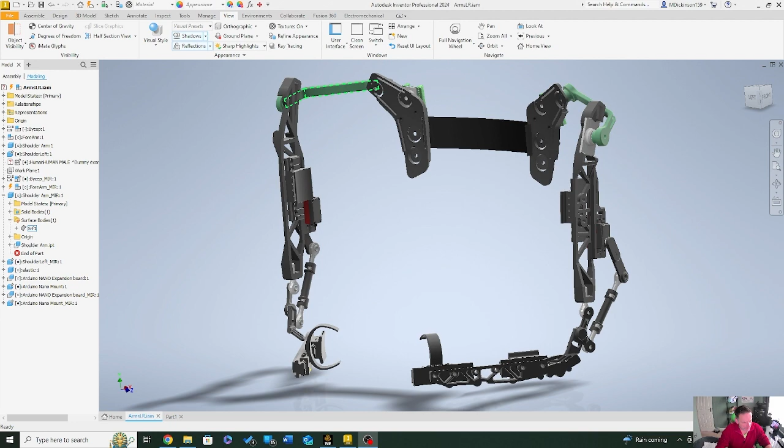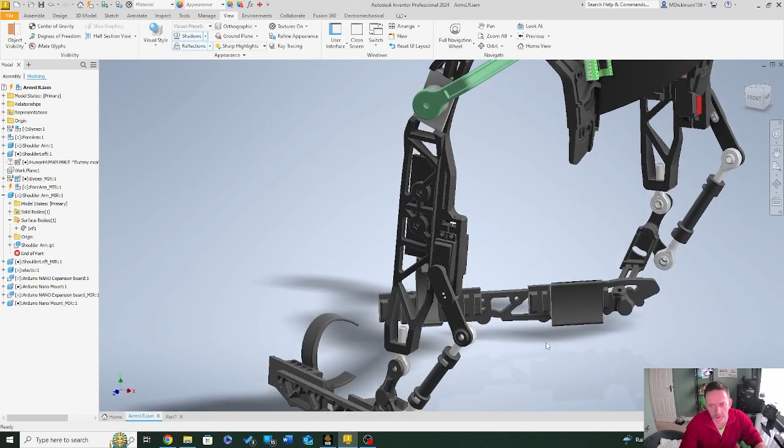Let me shrink it right down to here. Make that a little bit bigger. Okay, so you guys will not have seen this as of yet. This is an exoskeleton which has been designed to enable kids to actually really understand what exoskeletons are for, help with education. This originally started out as one arm, and I received feedback that it was too complicated, so it went from something like 15 parts down to 4.

So it's 1, 2, well, it's actually 1, 2 there, 3 and 4 attached on there. And I've recently added a shoulder blade on each side so that we can have a microcontroller. Really, it's interesting. We've gone through this so many times that this exoskeleton now is actually becoming a bit more of a viable exoskeleton. So just for you guys, it uses Picatinny rails.

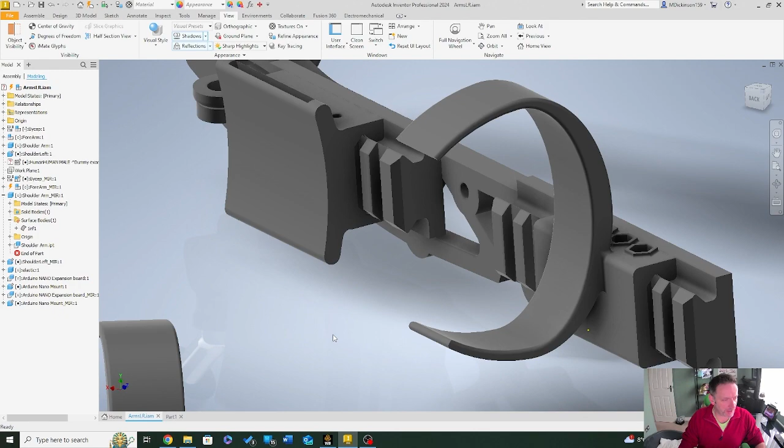Thank you, Aiden, if you are watching. Great idea. So one of the student chapters suggested Picatinny rails for quick release and access. And it uses Picatinny rails for the shoulder pieces as well, but the problem is it kept falling off your arm. Right, so let's not mess around too much.

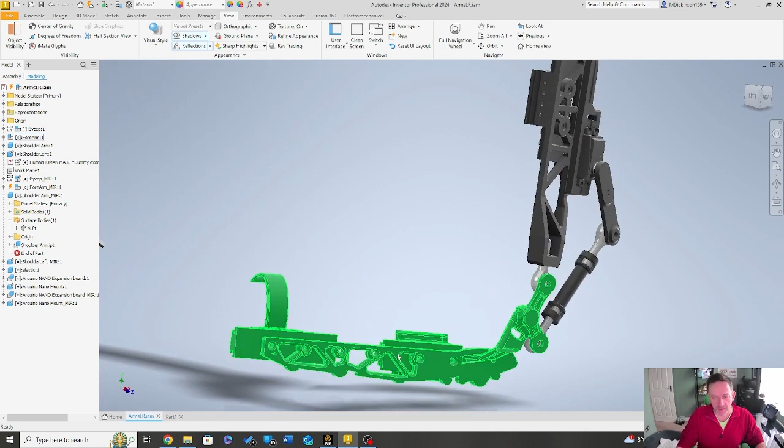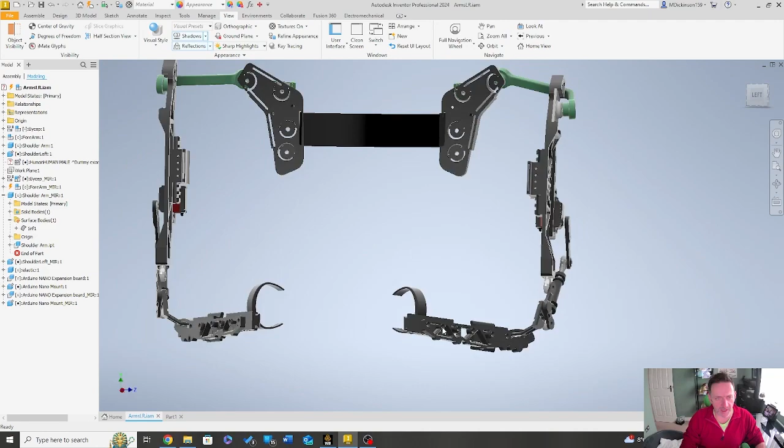You'll see here that the arm itself was originally designed to activate around the elbow. Now this section here is the brace piece. So what I've gone and done is I've taken a base material chunk. This is from the original design, and what we're going to do is pass this into Ansys and let this run through. Now the only reason I've not given you this is just because this still needs to be physically tested, and as to date, which is the 4th of the 11th 23, we've not tested it yet, but coming this Wednesday we should be doing that.

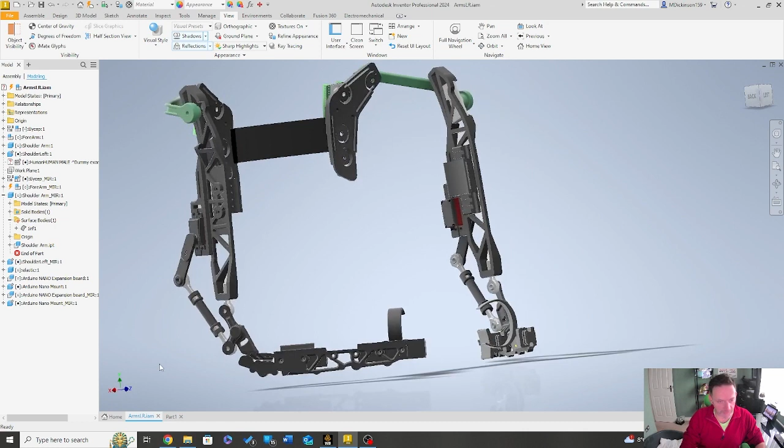Anyway, so let's not digress too much. So this is going to be my piece. Now what I want to do is I want to use a system in Ansys called topology optimization. The idea is when stress occurs, in fact, let's not mess around, let's get this out, then we can manually see this. So the reason I've gone to my Inventor is because most people nowadays tend to use a CAD system outside. So I'm going to export.

For this example, I'm going to put it on my desktop. Oh no, I don't want a shortcut. I'm going to put it on my desktop, and I'll just leave it as a new file. But what I want to do is I'm going to export it as a STEP file. I personally always operate in STEP files, and I'm going to click OK.

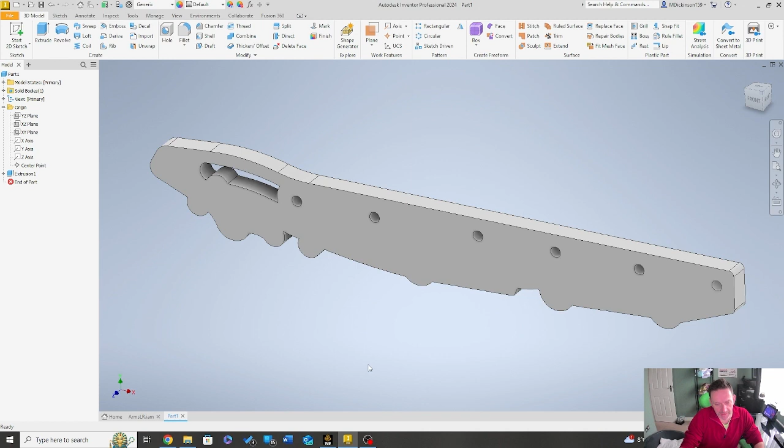Now in Ansys, this is Ansys release 22, and what we have here is our overall interface across, and I'm going to drag and drop a static structural approach. What I'm going to do first is look at the arm piece when somebody is holding a 20 kilo weight. We'll calculate out the force, because obviously it's 20 multiplied by 9.81, and that will give us the force that's applying around the key points of what we're going to attach to.

But first things first, let's bring in that geometry. So I'm going to right click, go to import geometry, and browse to the position where my geometry sits. Right click, and I will always recommend that you review this. So I'm going to use SpaceClaim to review the geometry. You can use SpaceClaim as a CAD system, but I only ever really use it to review the geometric representation.

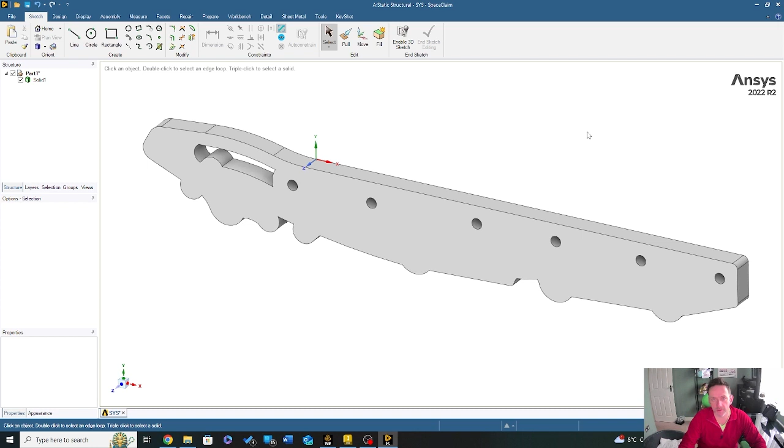After the part is imported, you'll get it brought in, and it's similar to any CAD system, if anybody's used to it. So as ever, you can spin it around, have a good look around. On the left side, you've got your design tree. Structure sits here. I can disable the solid and have nothing, or I can re-enable to ensure. Very, very basic principle process, good for reviewing and changing when needed. Okay, so I'm happy with the component. So I'm taking that back out.

For this particular one, I'm actually wanting to see how well this will perform. Not as a structural steel, but I'm actually going to do it as an aluminium alloy. So, let me just go to aluminium alloy. I'm going to go to my general materials, bring that up, scroll to a position, and I'm going to add the aluminium alloy. So aluminium alloy is in my study.

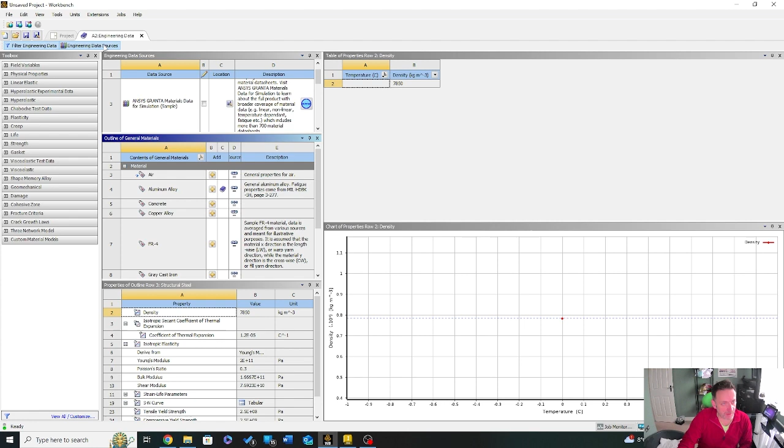Close this, and then I'm going to go to my setup, right click and then edit. After a couple of minutes, depending on your PC's capabilities, you will then get your geometry in. Now again, I'm just taking this purely from my Exo design. Once we've tested this and I'm happy with it, I'll release these designs anyway, so people can have a go.

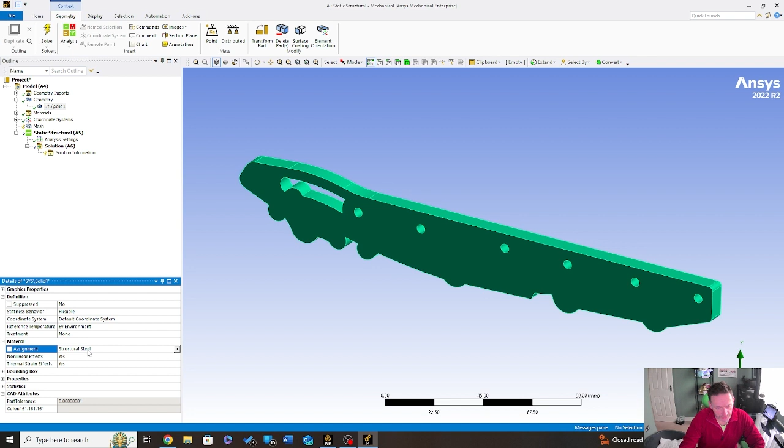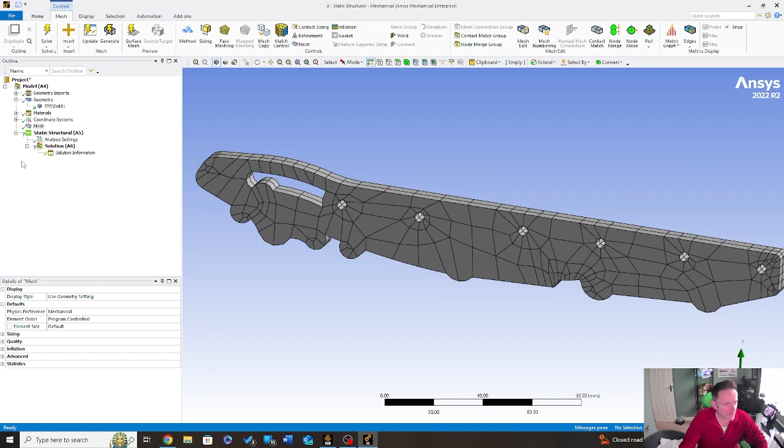For my material, I'm going to go to my geometry, and if you remember, I assigned aluminium alloy, but it's still structural steel, so I'm going to drop my assign and change it to an aluminium alloy. Now I'm going to do a normal meshing procedure. I'm going to just do a couple of things on this. If you look round at that as a piece, it is quite chunky. I'm not quite happy with that. But first things first, let's just get things going.

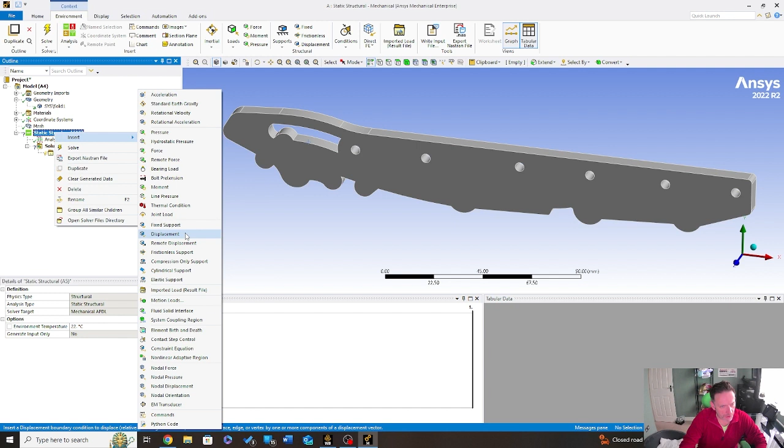I'm going to presume that it's fixed on this face, because based on the original geometry, that's how it actually fixes. It fixes around here where there is a plate that interfaces with the elbow. So we're assuming that piece here to be fixed. So I'm going to come back to my static structural, insert, and go fixed. I'm going to come to here and apply. So that now applies to that position.

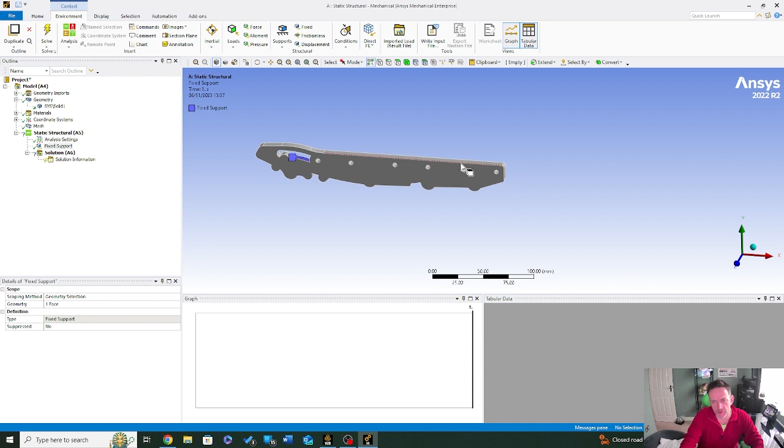Now, the way that this works is we've got parts all the way down here, and it's supported at key spots all the way down. I'm going to assume that it's just held on the end piece, because I don't want this tutorial to go on forever. I just want you guys to get a good idea of how to interface with this topological optimization feature, which is a fab feature if you do get a chance to use it.

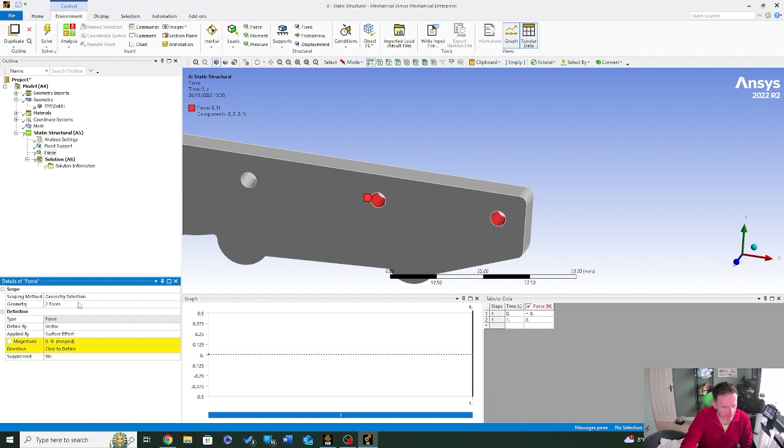So I'm going to go force, and come across here. In my force, I'm going to select this piece and this piece. These are the two holes that mount the Picatinny rail for the wrist. So I'm going to click apply. At this point, I can either go vector, where I choose which way I want to go, or, being a bit of a stickler, I like to use component.

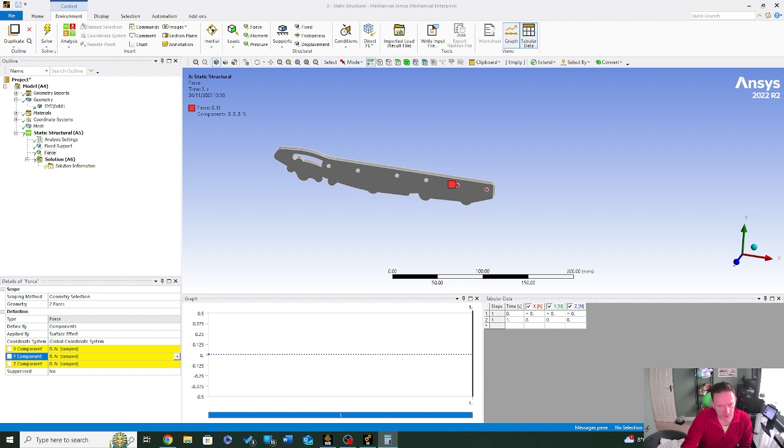So in this case, how many newtons do we need? We're going to presume 30 kilos. I think we're saying 30 kilos. Multiply by 9.81 for acceleration, giving us 294.3 newtons. But because it's divided over two areas, let's divide that by 2, and it gives us 147.15 on each key component spot.

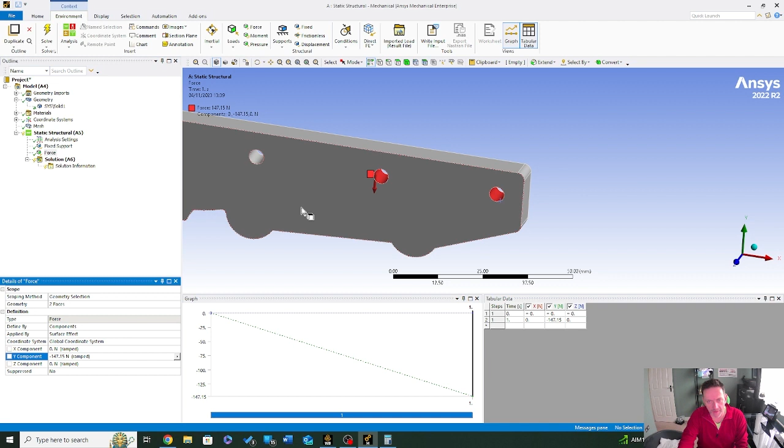So I'm going to go minus 147.15 and then apply. You'll notice I'm in the Y component, telling me I'm going downwards. Now I'd like to see how much it's displaced by. So I'm going to come to my solution, right click, insert, and go total deformation: how much did it bend in that process. I'm also going to insert equivalent von Mises stress, and then solve.

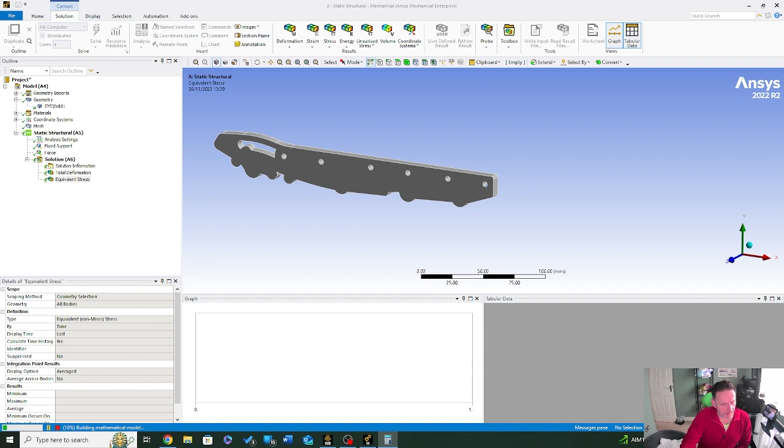This then runs through the solution, as we all well know, and any minute now it should give us a result. So the solution, and if I just take a look around, it's quite chunky, a little bit unreliable. I'm going to go to my edges and turn that off for a second. Look at that. Oh, it's horrid, it's awful. However, one important thing here is this section is red, this area. Then you look down here and there's all this blue, and there's next to no stress going on there.

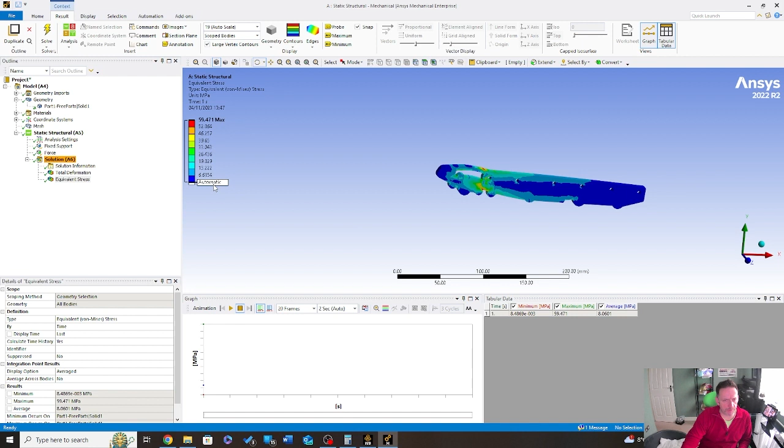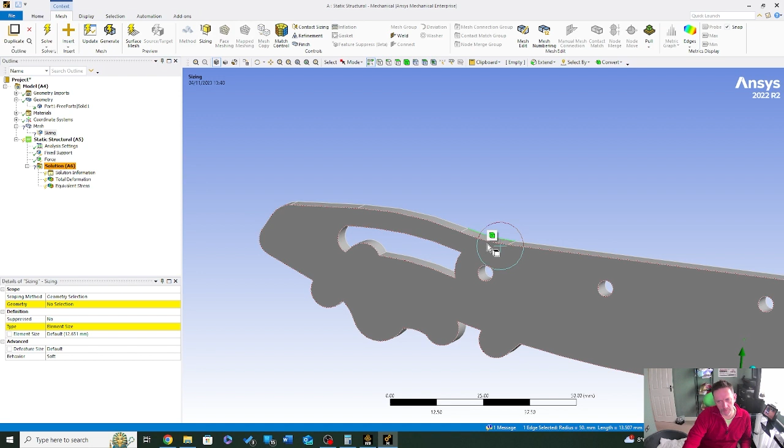This leaves a huge optimal opportunity to do topological optimization. First things first, I'm just going to quickly make a quick mesh to just tidy this up because I don't like it. So I'm going to go sizing, and let me just bring you out a little bit. I'm going to go this area, this area, and this area, and here, and here, like that.

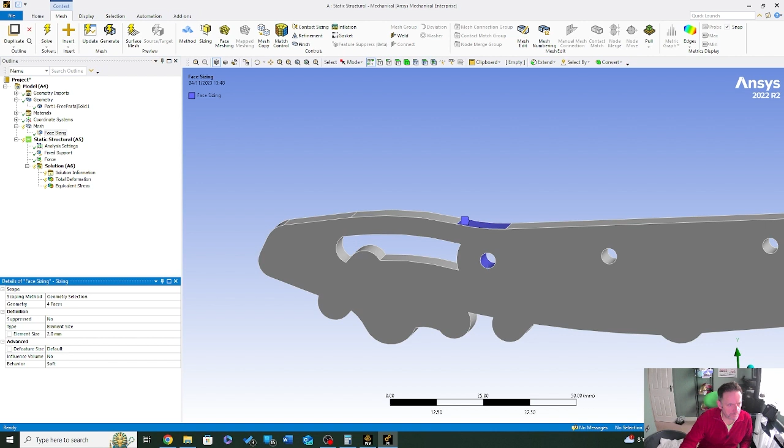Apply them into there. And size-wise, look there, default 12 millimeters. Boom, that's massive. So I'm going to go 2 millimeters. And then let's just resize that. It's still a bit chunky there. I'm going to go 1 millimeter. Give me something a little bit more. So again, generate that again. Looking a little bit more like it. Yeah, okay. I'll probably drop it even further. I want to get some true representation of what's going on, and that's a little bit better.

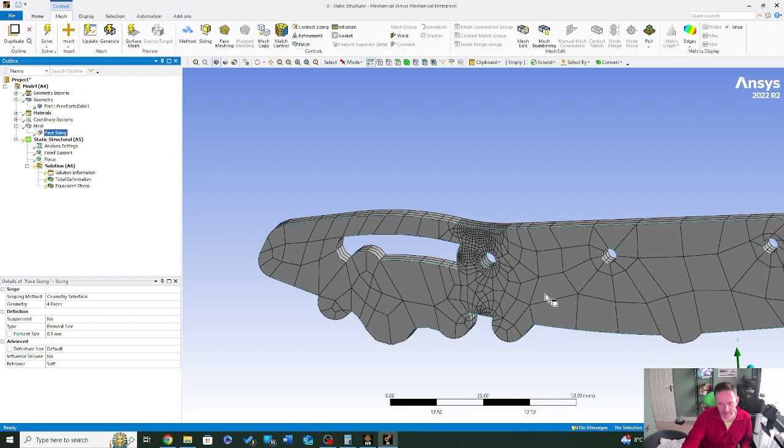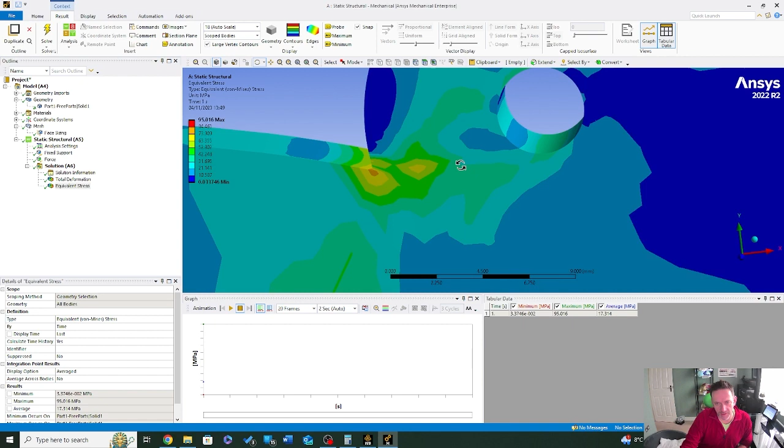Now you see there, if I just solve this again, it may allow for a little bit better of an optimizational process, which is what I'm after. So it's not perfect, but it's a lot better. Interesting, let's check it out. It's not the highest spot I thought it would be, and look at that. It's actually where I'd imagine, concentrating on the edging, which is good. And also down here, look at that. Now that's purely because, if you have a quick look, squeeze, squeeze. It's just squeezing on that lower spot.

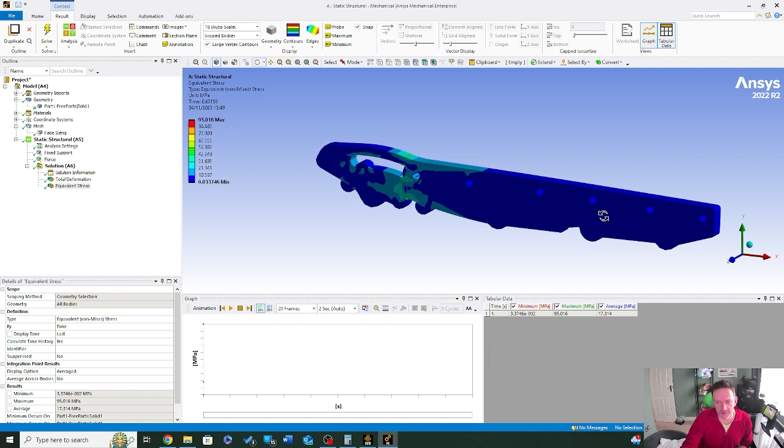So it's fine. It's well within the remit of what I want to do. So now I'm happy. I'm going to come out of there, close that, and now this is cool. I'm going to go down to structural optimization. I'm going to drop it over solution, and watch this. Bang! Results shared. Everything's within it. Right click. Let's go in and edit.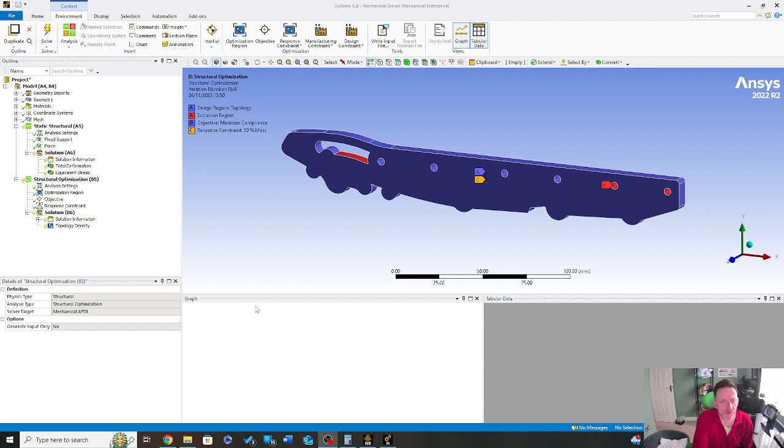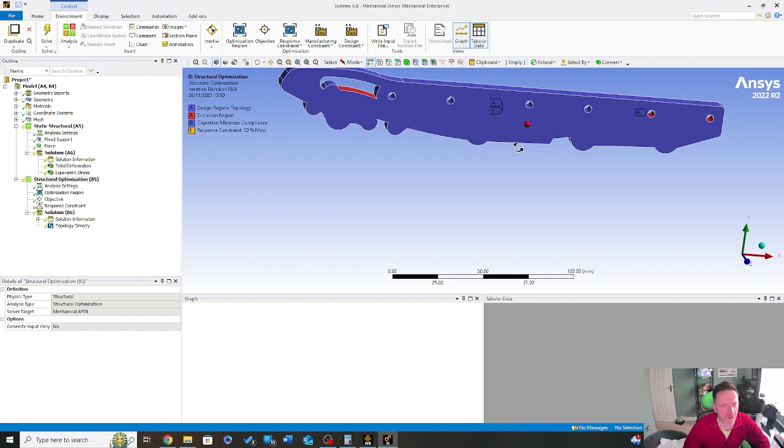Okay, so now once we've double clicked into topological optimization, you can see here the design region, and Ansys has already noted where it's actually going to be used. You've got your region A noted here to be the design region for topological optimization. You've got regions to be excluded, which automatically excludes the boundary condition areas. And then you've got the constraint of 50% of mass, and nothing is on there as of yet.

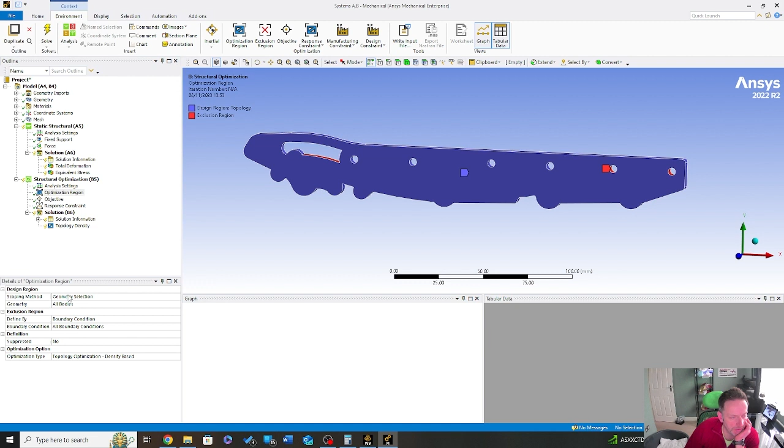So if I come down to my analysis, we're going to leave it at 500 iterations, trying to converge at an accuracy of 0.1. For output controls, we can choose different types of files for outputs. We'll come back to this in just a moment. So optimization regions. Within my optimization regions we can make some changes. We can look at all bodies, or alternate conditions for boundaries, but we're actually going to leave that.

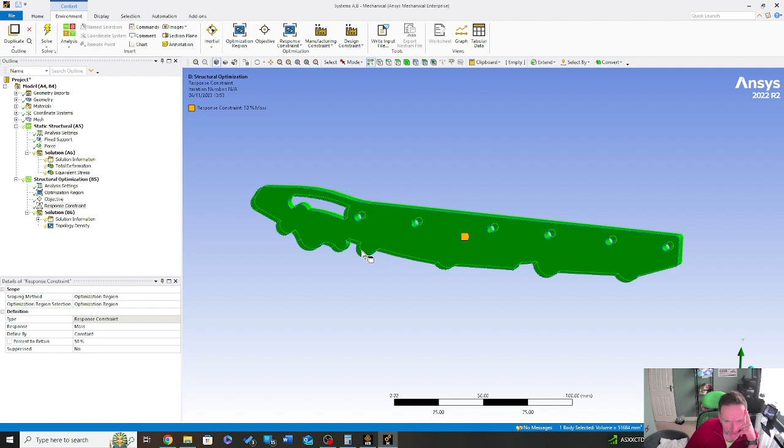So this is where it's quite cool. We're going to go objective. Under the objective, this is the default: program controlled, under static structural results, and it will run compliance from there. And then we have response constraints. I know for sure I've missed something out here, I think an output control, but I'll come back to this. If we come back to the constraints, you can see on here.

What I'm going to do here is change my percentage of material to retain. I'll go 65%. We can drop that down, but what this will do is run through topological optimization as many times as possible to try and get the most optimal result.

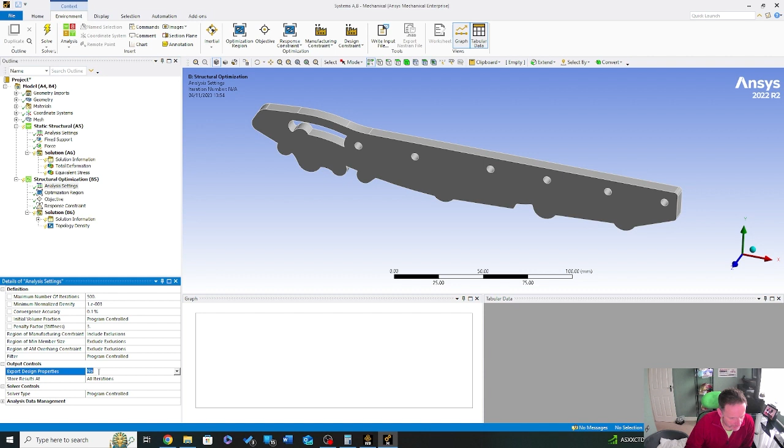I just wanted to check on something. So output controls, export design. Let's have a look. File to region, it's not that. Iterations? No, it's not that. Drive me mad. Ah, right, hang on. I was looking in the wrong spot. So for post processing, you see there it's only geometry. I can go only geometry yes or no. Topological density. Where is my STL export? 1 second.

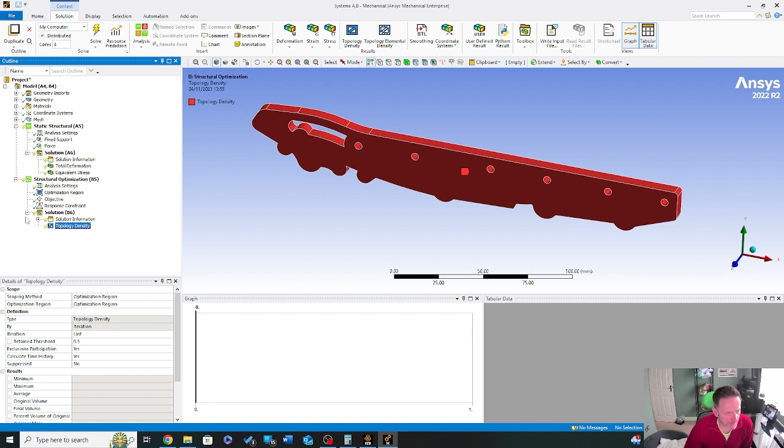So now, based on everything that we've got here, based on the topological setup, we should be ready to solve. So if I now hit run, if I solve...

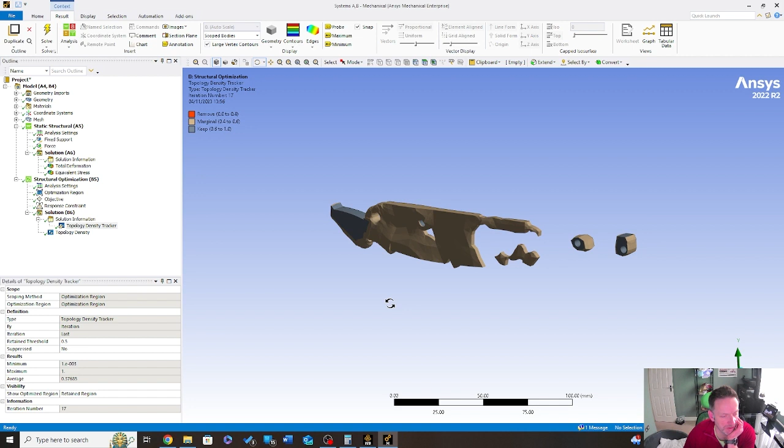Once it's done, you'll notice I've clicked onto topological density tracker, and this shows the processes it's going through, how many iterations, and the changes it's making. We can instantly see that the 65% material loss I suggested is not the best option.

It's given us different types of solutions here, so let's run through what it suggests. Yes, you see there that 65% is way too much. I should have really planned this one.

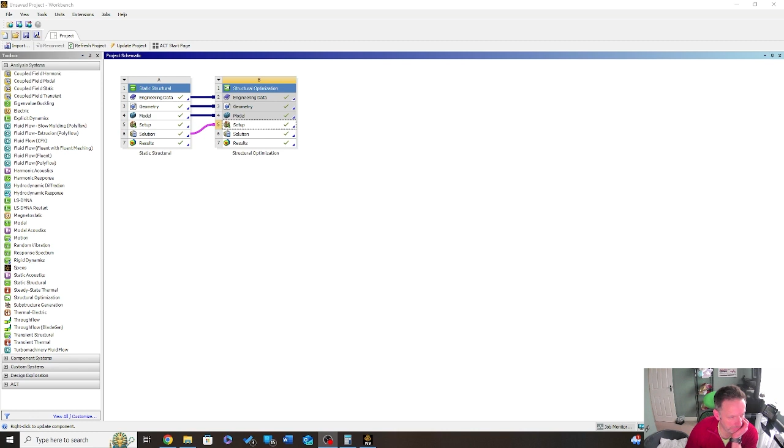So I've gone to change my percentage material retain, and rather than going for 60, I've gone for 85. Might even go 90%, just to give it a little bit more possibility of survival.

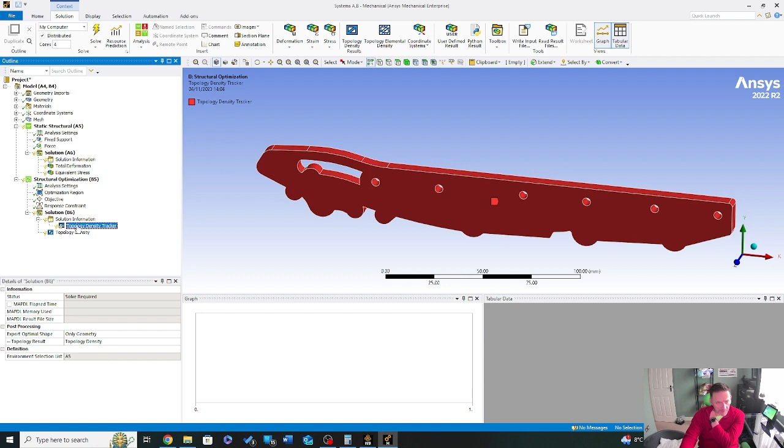So what I'll do is click on my topology density tracker and hit solve. If I try this again - had a couple of moments there where it just went on and off. I've now changed it to 85%, I'm on topology density tracker, and let's go solve.

Boosted it up - the regions were just too much. And really what I could do is restrict even further areas, which I'd like to be able to go back to. So let me just go.

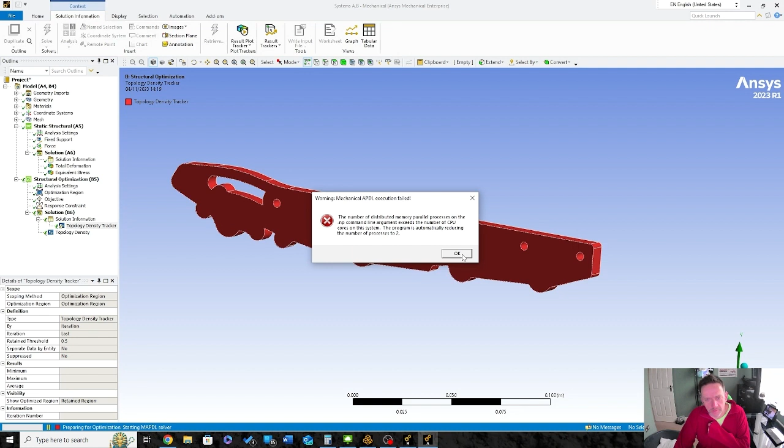What I'd like to do is restrict key particular areas, and in this case I want to make sure that where the Picatinnys are mounted, that they are also taken into consideration. So basically where the holes sit, I'd like to restrict them from that particular study as well, to make sure it gives me something sensible.

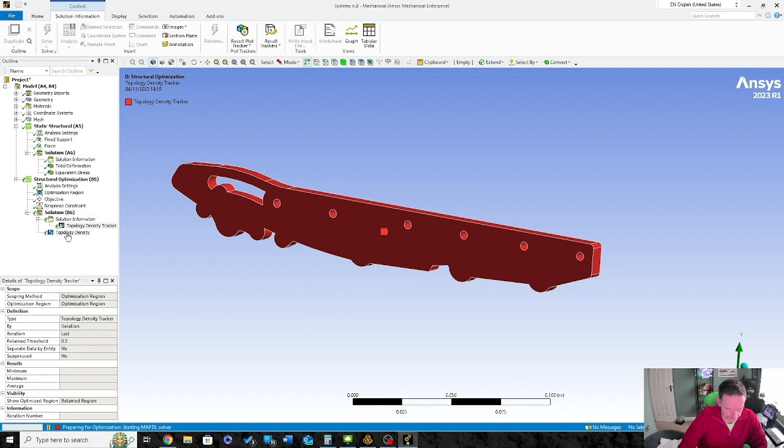And any minute now we should start to get a solution. And here we go. Let me go solve.

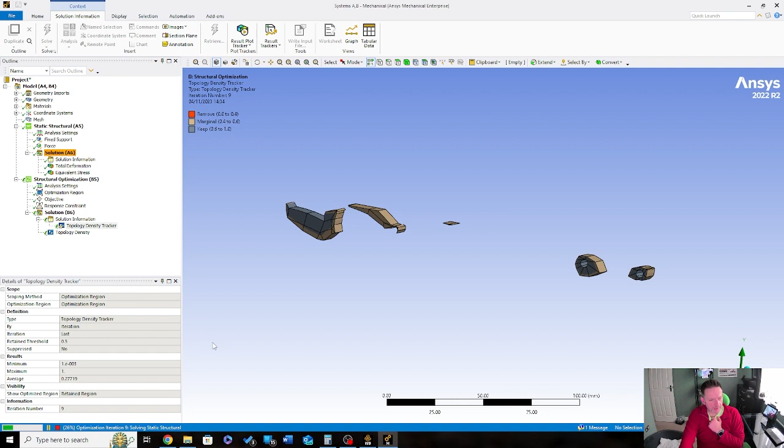But you'll see there, it crashes like mad because it's going - that's what it's actually done, and that's what it recommends, and you go, no, that is not what I'm after. So you just see there, it chops it all right back.

And then what I'll do is say, right, let's optimize the region, let's retain 20%. And then I'm going to do it again, so I'm going to solve.

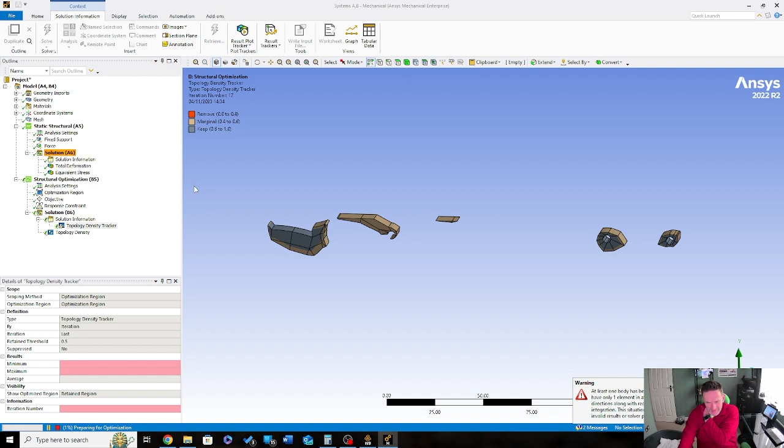If it's not going to have a dippy fit with me, because now I'm going backwards, I'm going all over the place. So we'll let this run through. So I'm now at 20%.

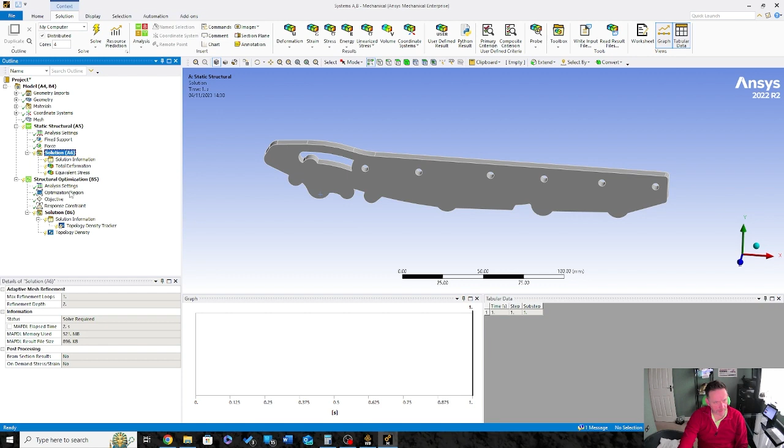So you're probably wondering, why is it doing all this weird stuff? Why is it creating these really odd regions? These normal regions actually appear just because of the optimization regional areas here - let me just rerun that - these appear purely because...

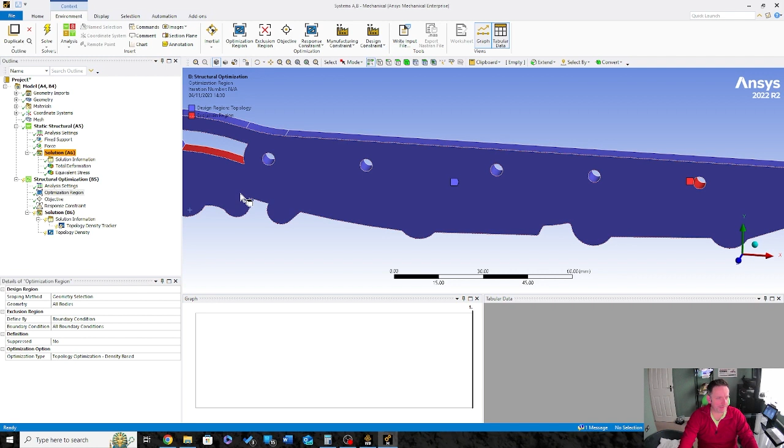...this design region for topological optimization, you basically said use anywhere on here, and it doesn't know to keep it all in play. Those of you who've seen generative design functions know that it can optimize areas, and you can actually put in key regions to it.

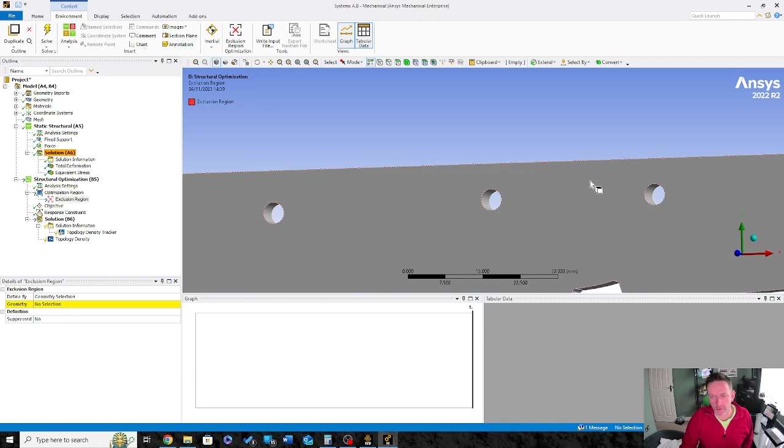So what I'm going to do here is give an exclusion region. My regions now - I know that I need these holes to be able to move forwards, and that one as well. These holes are there for where the other Picatinny rails are going to be. So I'm going to assign them.

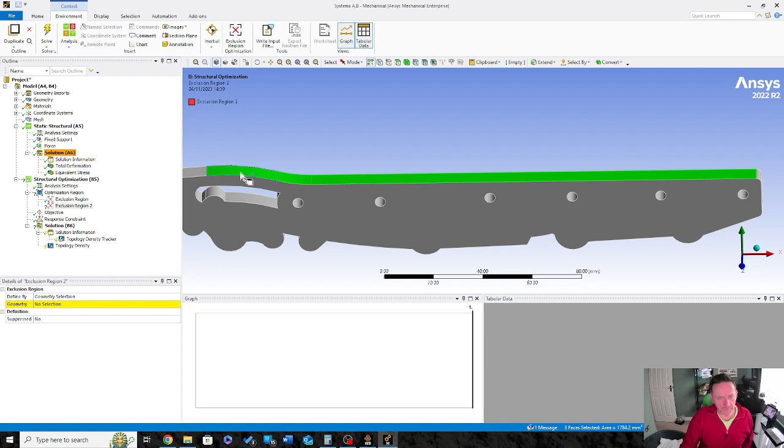Next thing I'd like to do is offer another excluded region. So I'm going to go around the actual outside piece. What I'm actually referring to here is not really...

I'm just colouring in, sorry. What I'm actually referring to here is not really on the outside face. I want these outside faces to retain here for this particular reason, because I want to be able to use the external to ensure that the assembly still works.

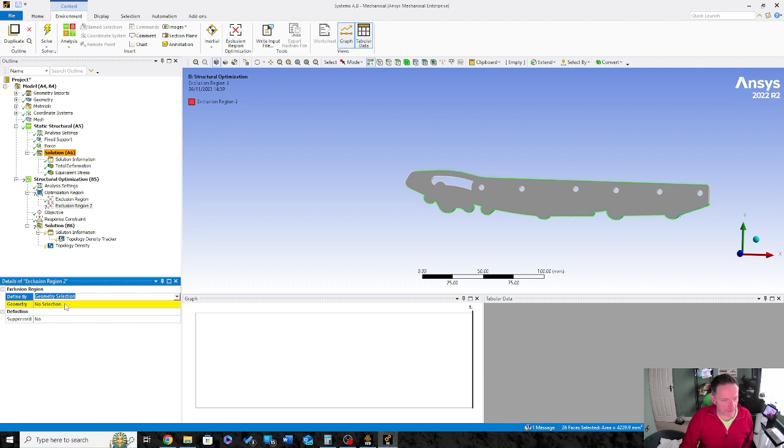What I want Ansys to do is consider the insides - is there something that could be done with them insides? So I'm going to just shift myself back, I'm going to say retain, I'm going to go back to 85%. This has just been me playing around. And what I'll do is run to a solve.

Now you'll notice that my meshing's dropped a little bit.

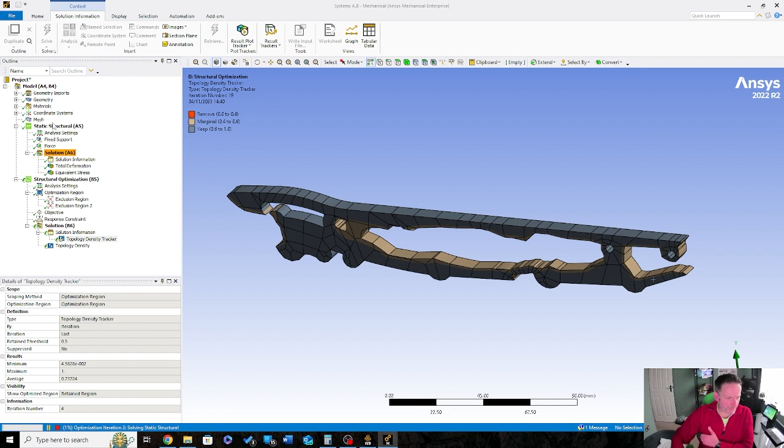I think I've lost one of my faces as I was just messing around. But what you'll see now is it starts to cut key particular areas out. Based on the results it's actually producing up here, it's recommending that the topological design could actually do away with these areas and still perform based on the criteria.

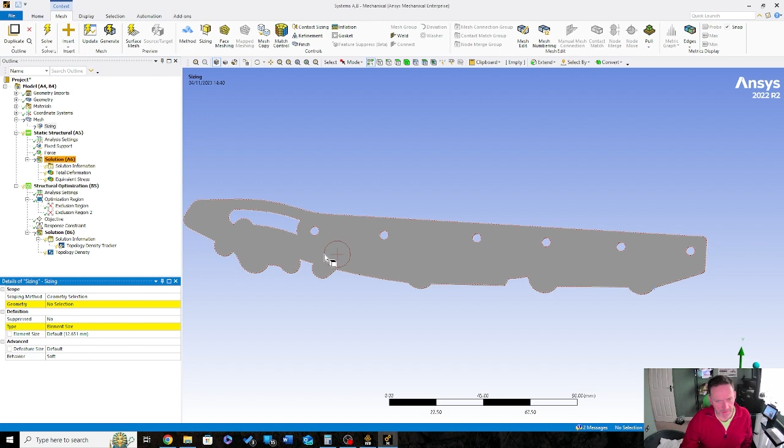The only thing I'm a little skeptic about now is it seems to have lost my regions of refinement. So I'm just going to add them back in, because for some reason I've lost them. I'll go on there like that, and I'm just going to rerun this study once again.

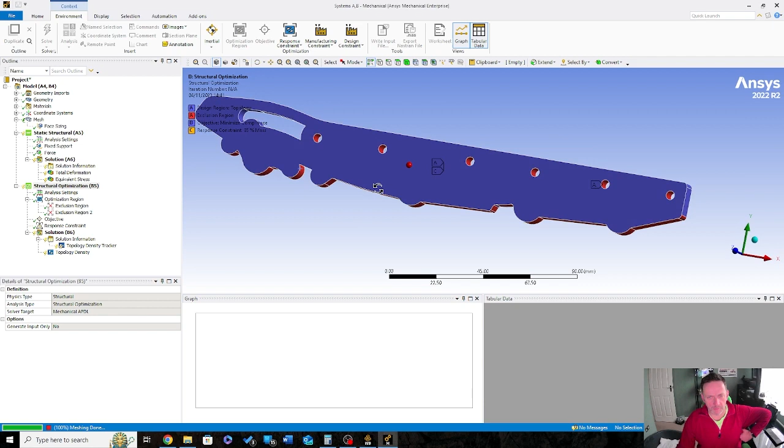If I run it again, what we start to see is it will run through that topological optimizing. Again, the red regions are where I've said don't change these, keep these in play. If I go to my tracker, give it a moment. Now what we get is it starts to rerun its key particular study areas.

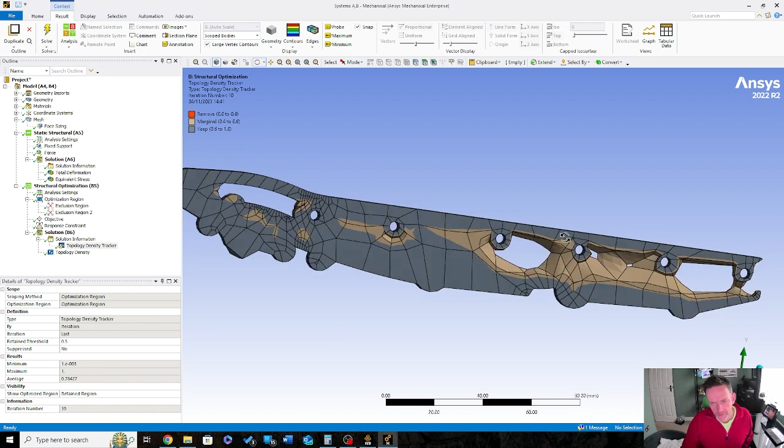Now look at that. Based on that refinement that I've put in there, it's now starting to say, you know what, I probably can't do that. And you'll notice on the mesh here it's quite clunky. Arguably, the end piece it's actually saying you could perhaps trim that right back.

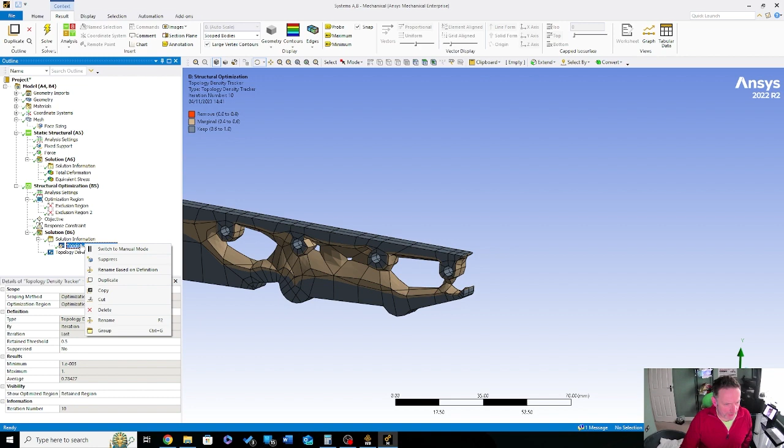If I want now, I can come here and export to an STL straight outright if I wish. This is quite interesting. So if I just now hit save, I'm just going to drop out of here.

Now what I'm going to do is go back to another static structural, and from my results I'm now going to bring it into the geometry here. From this, now I'm going to go into my study and go edit.

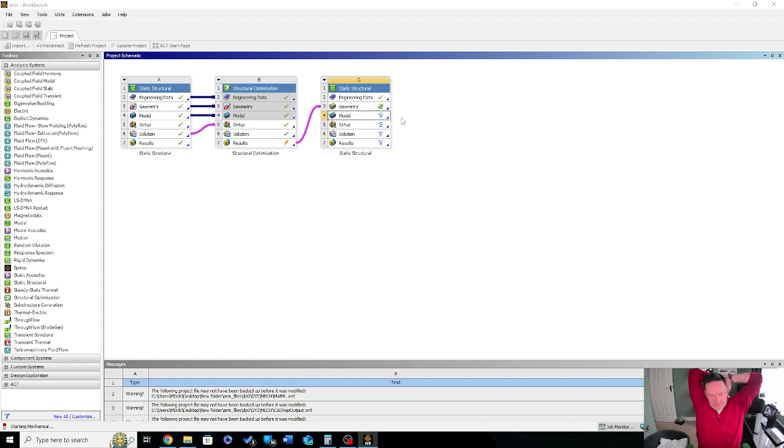Okay, so that just was not playing ball, so I've just removed that. I'm just going to pass back into my original. Right, get back to this original. There we go, on for the topology density.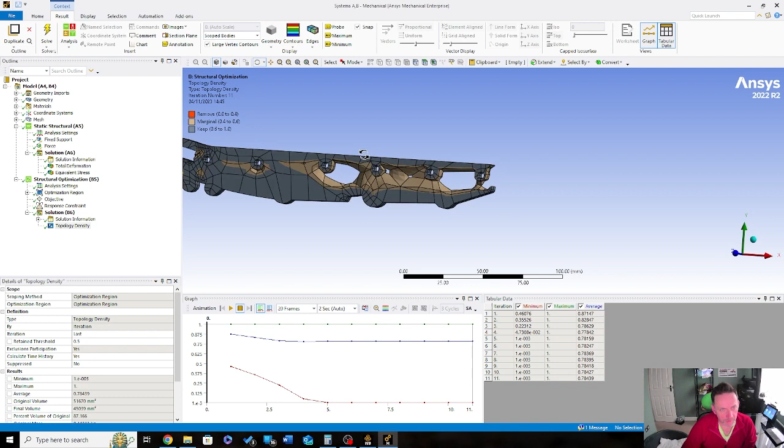You can see there what's been exported, so I'm going to export this, and I'll export this as an STL file. Let's just put this on my desktop. Let's go File, stick it there.

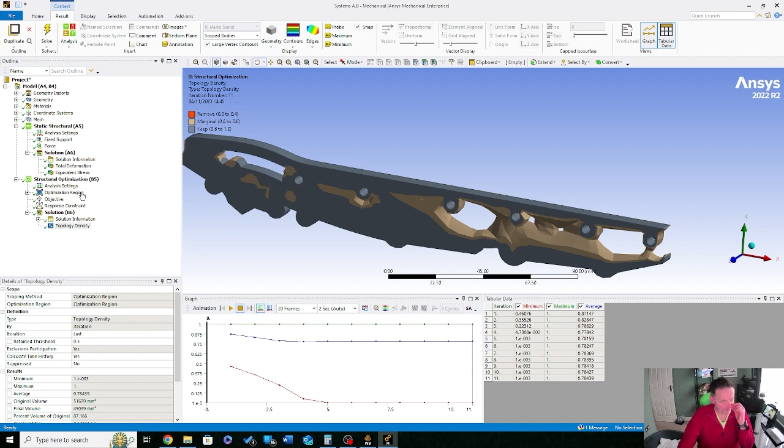And then what I'll do is I'm going to take this through to my Cura. When it actually loads, so now what this has done is it's topological optimized the actual profile.

And granted, I could run this through quite a few iterations yet to actually look at different changes that could be made. There is a bit, but this can now clearly indicate and help guide me into what I need to do on my next steps.

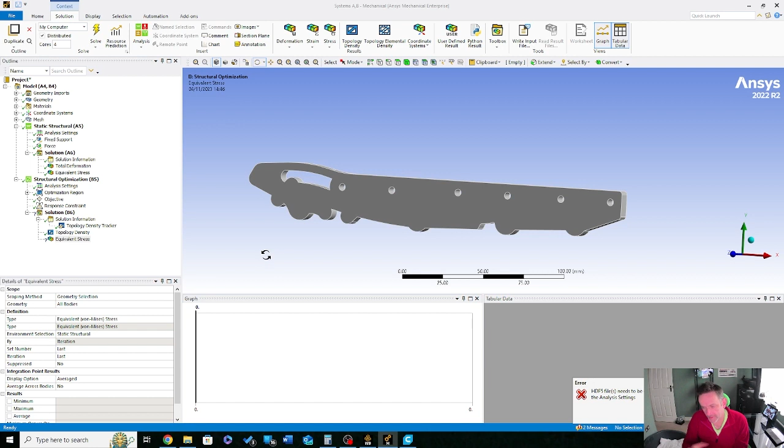This is quite a useful tool, and you can do all types of different things from here. So the equivalent von Mises for the stress. So let me just evaluate the results on there. Oh yeah, it's only just because it's something else.

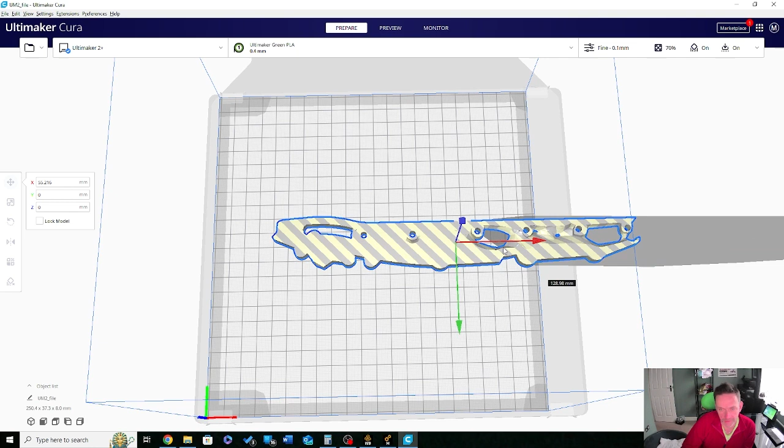What I can do with this is I can do all sorts to just look at the next iterations of this. Just to show you, if I'm in my Ultimaker, my Cura, I can come onto my file and then I can import the actual topological optimized profile, bring this right across to here, and if I just flip you around a little bit, you can see there I can actually produce

the part based on what Ansys did. Now you see there that my mesh is quite big, but it is a good insight and a good indicator to getting it running. Right, so I hope that you all found that quite useful.

I hope that that's been a good insight. This has been topological optimization, and using this for exo designs, in particular the exo, we've actually not named this project. I didn't think it was going to become something that would need naming, but this has been purely based on the exo that's going to be the one for public engagement, and it has now become a shoulder exo.